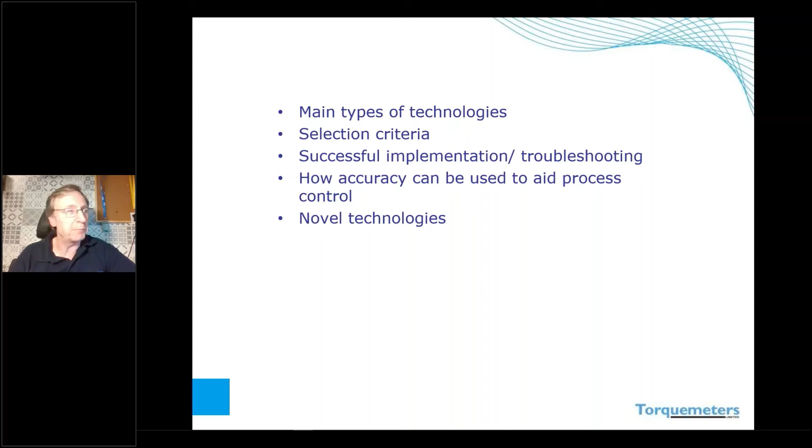So, what's a torque meter? It's an interesting question, and I've met people that only ever thought there was one type of torque meter. There are lots of different implementations, but basically it's a device that measures the twisting motion of a driven shaft or a coupling under load.

When a shaft is loaded, it twists. If you can measure that twist somehow and you know the speed, then you can accurately work out how much power is running through that shaft, and that informs on the driving machine and the driven machine. So in most instances, it's a power measurement device. It's independent of the OEM, and that can be useful.

I have to be careful and diplomatic, as a good Englishman should be. The OEMs obviously have their own patches to protect, and the good thing about most torque measurement devices is they are independent of them, so you can have an interesting discussion with OEMs about the power that you're seeing or the power that's being used by a compressor or pump.

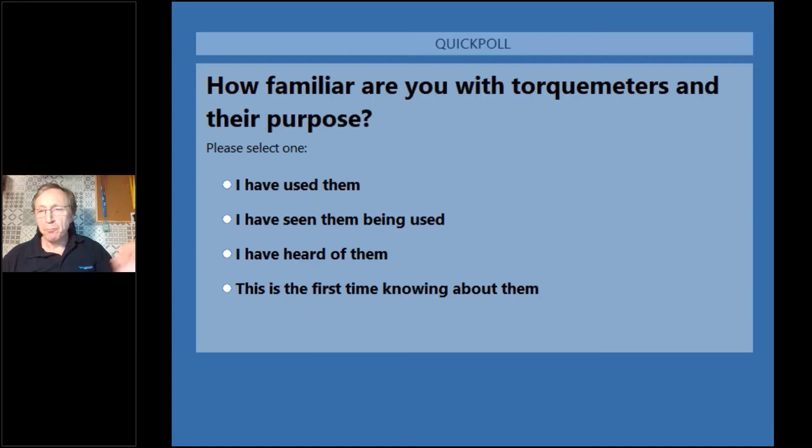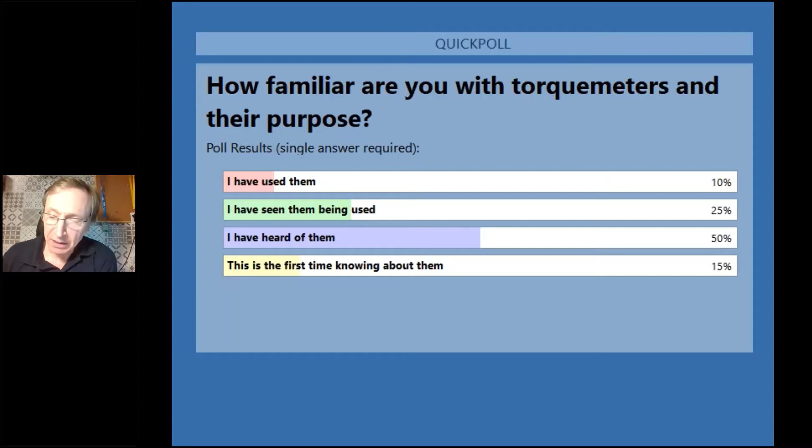Oh, 50% have heard of them. Not too many have used them, 10%. And a good amount, 15%, no idea what they are. So good spectrum, that is good. And that also informs me that there'll be people there that can ask some really difficult questions. So that's slightly worrying. But hey, we'll cross that bridge if we come to it.

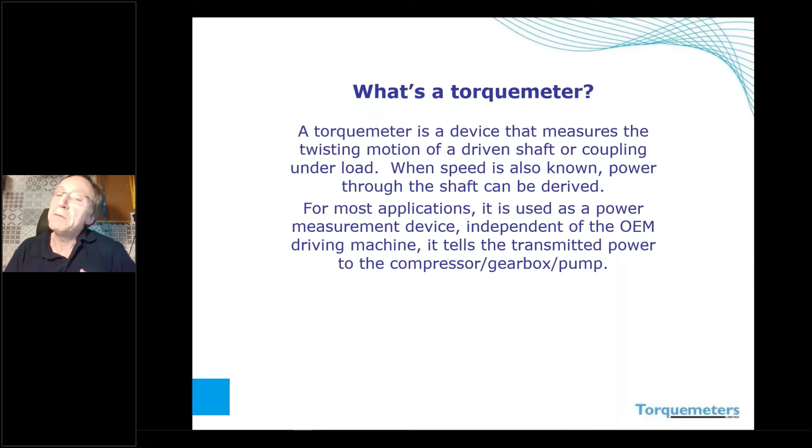There are 2 main technologies. And when I said that people use torque meters as a measuring device with a small t, they generally think of them as all the same. This is where it gets interesting in that there are 2 main types: strain gauges, which are very popular, and phase shift, which are, I would say, less popular, and there are reasons for that, which we'll come on to.

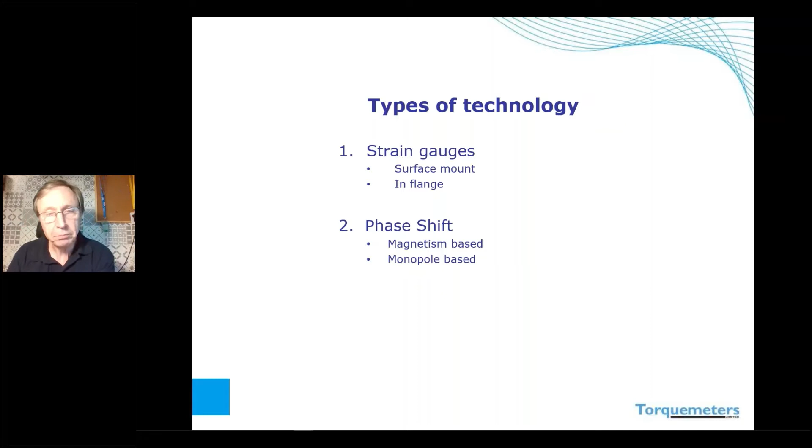It can also be placed outside, and when the shaft is twisted under load, the resistance of the Wheatstone bridge arrangement changes, and that means you get an imbalance in the Wheatstone bridge, and that electrical imbalance is translated into a torque reading because the stiffness of the material is known. So from that you can work out what the torque, and therefore the power, is.

And it's a really interesting way of doing it. It's been around for a long time. We've used them for some of our aerospace applications, and it's a tried and trusted situation. So you can either fit it on the inside of the shaft, or you can also put it on the outside. You need some other pieces of modification, but you can basically use the same coupling. And so that's basically what a strain gauge looks like.

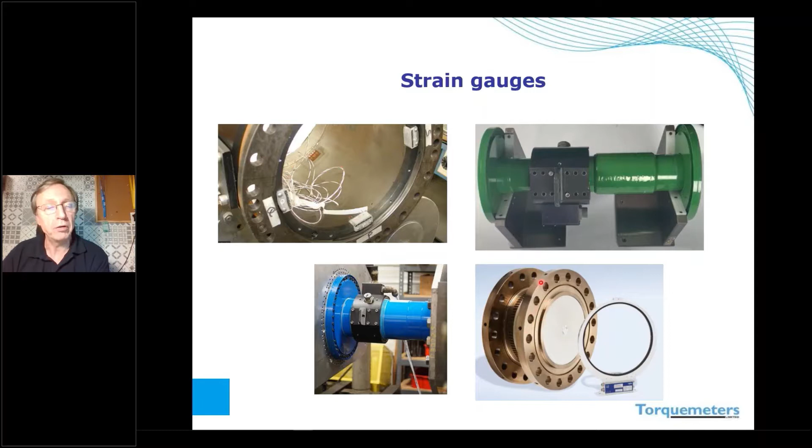There is a second type where you actually buy a complete flange that sits in line of your shaft and has the strain gauge already built in and calibrated. You can get different flanges for different power measurements, and they're quite neat and tidy, and you don't have to mess around with doing anything to your own coupling if you're going for this sort of technology. So that works quite well.

And so you have a coil around the outside that will generate by induction the power required to power the Wheatstone bridge, and also would take the signal back across to a control room somewhere. So there are a number of components.

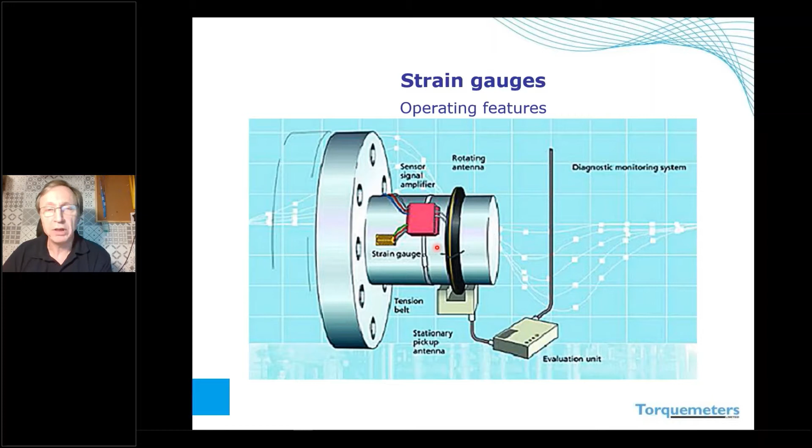That sort of will lead into some of the difficulties that I've encountered when people have used strain gauges, but we'll talk about that when we get there.

The main benefits of strain gauges, there's one huge benefit. Compared to phase shift, it's cheap and cheerful. You can strain gauge a shaft for a few thousand US.

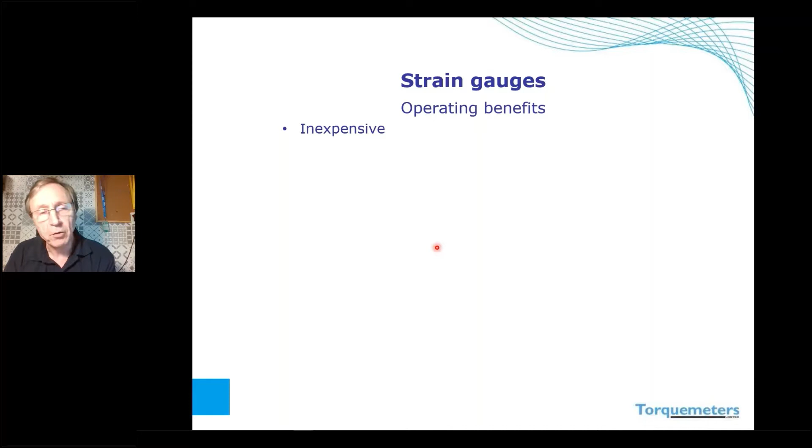You also can use the coupling that you have, or the shaft that you have, so you don't need to modify the running coupling in any way except to stick a strain gauge on it.

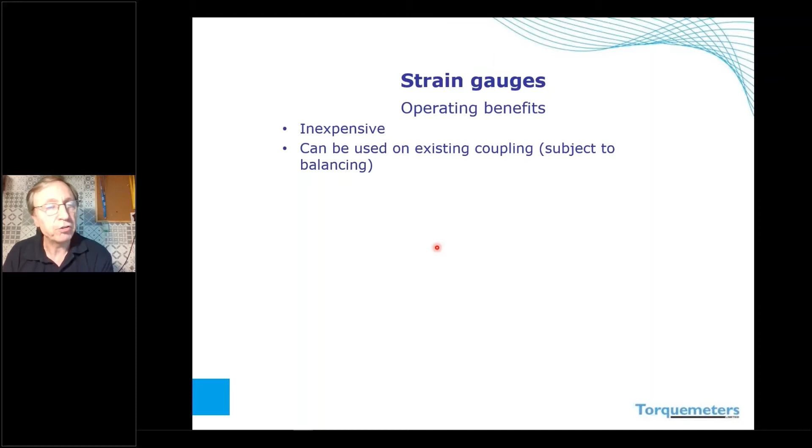And you can use it for torsional vibration measurements. Again, that's something we see quite often these days, where you've had a shaft failure over time and you replace it, and then it goes again and you replace it, particularly on fans and stuff. And it's not that the shaft's been overloaded, so the only suspect after eliminating everything else, bearing failures and the like, is torsional vibration, and putting a strain gauge on it will give you some good data as to exactly what's going on. So that's another benefit of strain gauges.

And like all things, not everything in the garden is rosy, as we say in the UK. It has electronics that rotate with the shaft, so you've got to be a little bit careful about what your intention is. Why are you strain gauging it? What are you expecting to get out of it? How long are you going to be using it for?

And that's quite important, because electronics rotating at any speed, 5,000 to 6,000 RPM, it's going to put stress on the components, both the components that power it and also the components of the Wheatstone bridge itself. So be careful of that.

Also, once it's in, it's in. Generally speaking, depending on the application, you put a strain gauge on because you want to measure it when it's rotating. What you don't want to be doing forevermore is stopping it because you don't think it's right, and having to stop it and check the strain gauge or reapply it, and then have another go and get a different result, thinking, well, which was the right result? Was it the first one or the second one? You don't want to get into any of that. So you've got to be pretty sure of your installation before you start running.

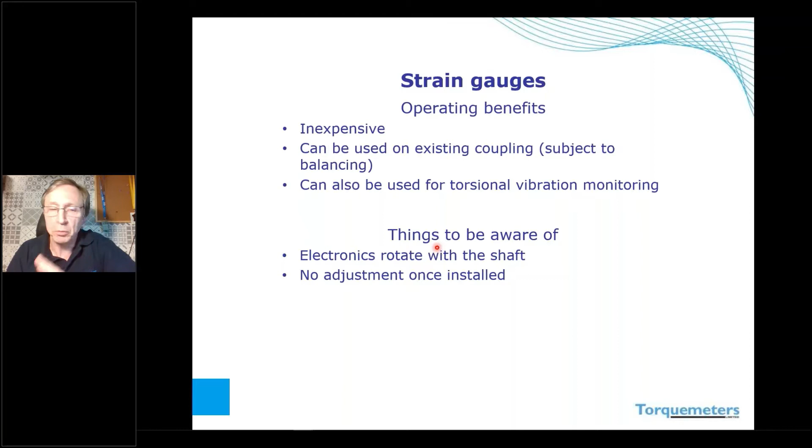And of course, the flange version is factory calibrated, which is fine in the factory, and it's only good in the factory if you can't check it once it's in the field. One of the big problems with strain gauges is that you can't really do any sort of checking of its calibration unless you take it off, and that's unless you stop the machine and then do some sort of checking of the install and some of the readings and some of the positioning. So it's not ideal from that point of view.

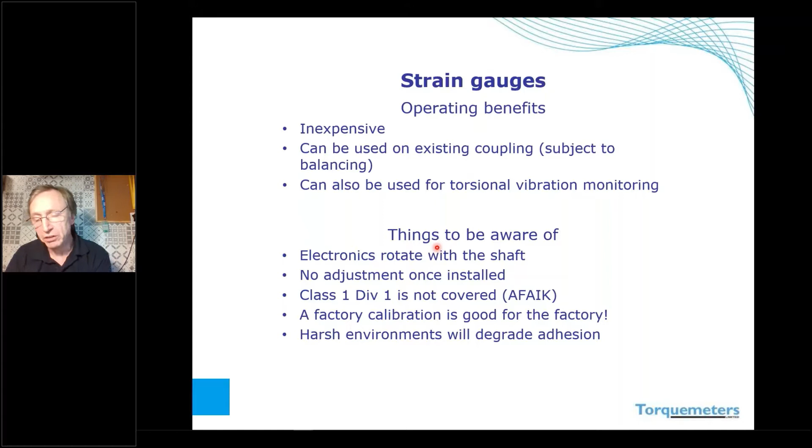The basic philosophy of a strain gauge is that you stick it on. It's glued on, and the degree of adhesion in a harsh environment, specifically oil and gas, but also if it's close to shore or any of those sorts of harsh environments, it's going to limit the adhesion for the strain gauge over time. So these are things you've got to be aware of, and there are lots of situations where actually these aren't issues, and in those situations strain gauges are a really good option. I'll have a table later on that shows where you should and where you shouldn't perhaps use each of the different sorts of technologies. So that's strain gauges.

Phase shift. Now phase shift is basically, from my experience, and I'd love to be told that I'm wrong, there are two different ways of doing it. You do a monopole or you do a Torquetronic.

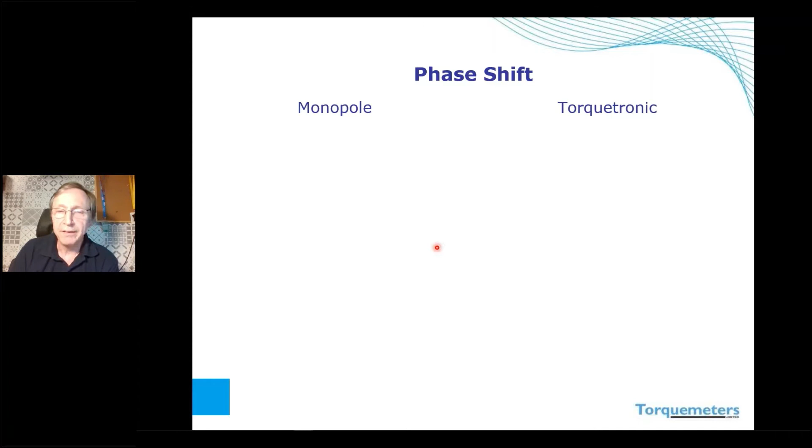Now a monopole basically is this system, which is basically Kop-Flex. If you're familiar with Kop-Flex as a Regal Beloit coupling brand, they have a very good phase shift torquemeter device. It still works on the principle of twisting of the shaft, but rather than the shaft twisting and having something stuck on the shaft, there are wheels that are fixed to the shaft at 2 points, and then they're brought together in a mesh configuration, as you can see down here. As those wheels offset under load, that's where you get your measurement from.

These changes in phase are picked up by two monopole sensors. They're passive variable reluctance sensors. Generally you have two at 180 degrees to help with alignment issues. So that's one.

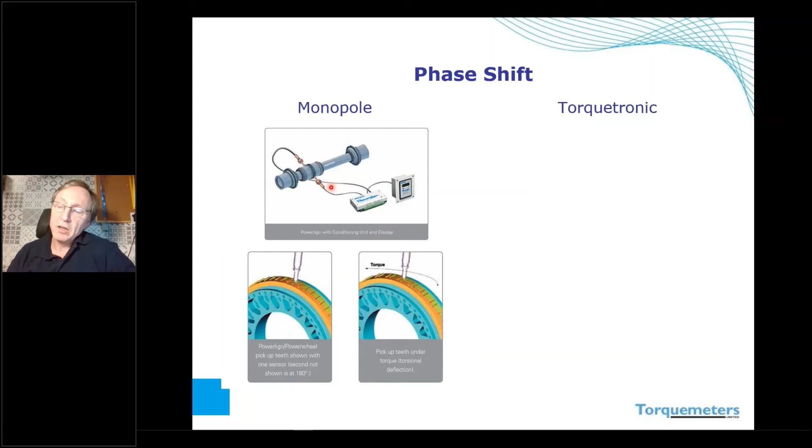The second one is Torquetronic, and that's the one that we do at Torquemeters Limited, and we've been doing that since about 1974. So there isn't anything new or sexy about this. I'd love to say it was, but it isn't. It's basically a slight modification of the coupling, which you can probably see there's a tooth wheel here and a tooth wheel here, and everything else is the same, and the coupling guard is manufactured by Torquetronic.

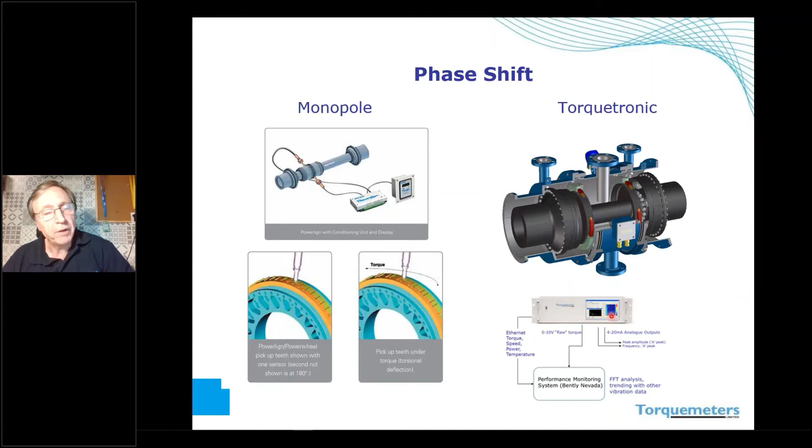Signals are generated inside these coils here, which I'll show you in a moment on the next slide, and then those signals go to a decoder, either in a control room or locally mounted. So this is how the signals are basically derived.

Both methods use the fact that sine waves are picked up when teeth cut through the sensing area, either the probe here or through the magnetic field generated by coils. There's a coil inside the coupling guard above the teeth at a space distance to allow for enough twist. As you twist, these sine waves generated from these become phase shifted.

Both couplings in both systems are calibrated so the stiffness is known. If you know how much they've moved and how stiff it is, you can derive the torque reading. So that's the main difference: you've got physical manifestation of twist in the metal itself moving on a phase shift device, versus something stuck to the shaft or coupling spacer that provides signal on a strain gauge.

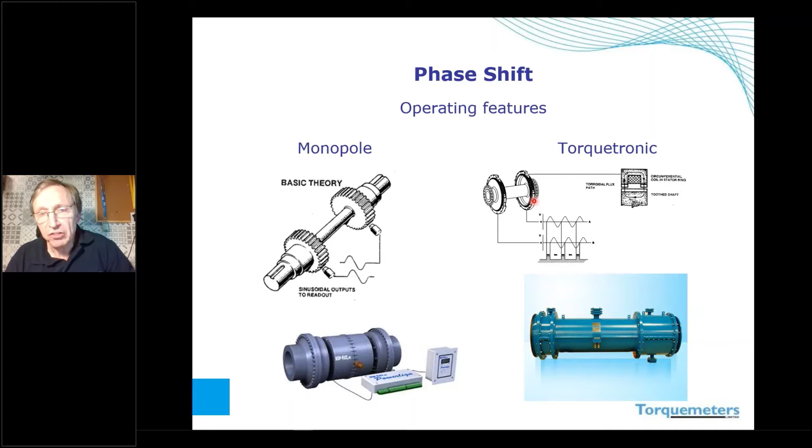So just like we talked about with strain gauges, a little bit about the operating benefits of phase shift. So for a monopole, there are no...

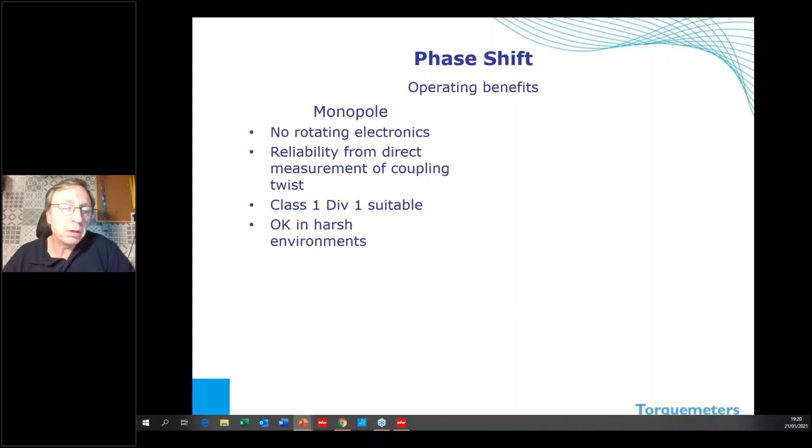I want to interrupt for our audience just to let them know that they can submit questions via the chat or the question toolbar. We'll have time afterwards for reviewing those questions. Okay, we forgot to tell them that, didn't we? Oh dear, that's my fault. That's okay, I thought I'd done something wrong. I thought you were going to say, what are you talking about?

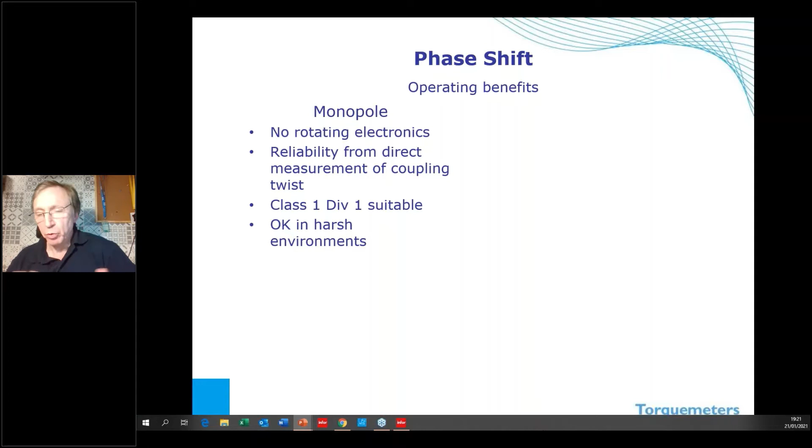So operating benefits of phase shift on the monopole: because you're taking readings based on the shaft, there are no electronics on the shaft to worry about. It's a direct measurement of the coupling twist. Because there are no electronics on the shaft, you can do class 1 div 1, and because it's just the metal moving, in general harsh environments are okay. So that's one of the main differences between the two technologies.

Similarly with the Torquetronic system, the first 4 are exactly the same. Torquetronic goes a bit further in that it will replace completely the coupling guard and has the ability to give a calibration check in situ. And it will do torsional vibration, whereas the monopole phase shift won't. There are a couple of other additional benefits.

So you could have a SIL2, which is safety integrity level, so you can use it as part of a functionally safe system as a control device. Basically, it's a redundant system, so it's 3 torque meters in one. If one fails, you've still got backup readings. Also, Torquetronic generally will do a temperature study to tell you what windage is going to do to your coupling guard environment. So those are the main benefits.

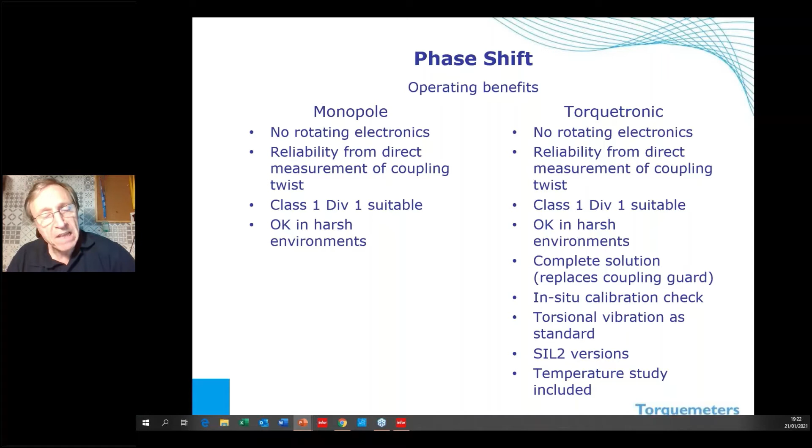But of course, like all things, it's not a panacea. There are things to be aware of. On the monopole, if you remember from the drawing, there are two probes, and they are supplied in a box for you to install as a user, or the OEM will install them.

The alignment of those - you have to weld a boss onto the coupling guard with a threaded hole, and then align the probe using feeler gauges, with certain tolerances. There's nothing wrong with doing that, but it's something you have to be aware of. You can't just chuck the monopole sensors in and think the job is done. There has to be alignment checks.

There isn't really a way to check calibration with that system, not that I'm aware of. It's a good system, and I've spoken to Kop-Flex about calibration, and their answer is it doesn't need calibrating because it's based on the movement of metal. As an argument, that's fine.

But I know I've seen people with clipboards who need to tick a box to say it's been calibrated, so being able to do a check is a useful thing. It also forms an additional section in the coupling because it's a drop-in section. Also, cost compared to strain gauges - it's more expensive, because there's more to it, really. And you can't do torsional vibration with the monopole system.

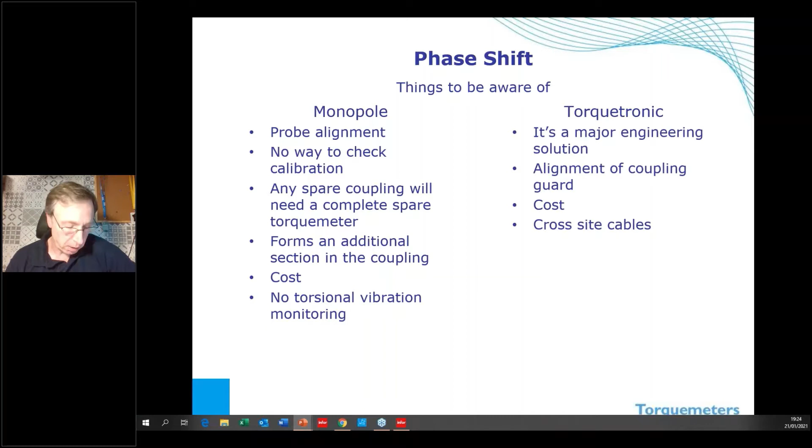With the Torquetronic, I suppose the main difference is it's a major engineering solution. Having to be involved with the coupling guard and how it connects to the driving and driven machines - all of these things add up to a bit more commitment from either the end user if it's a retrofit, or from the OEMs. If you need to know where the compressor case is compared to the shaft end, normally nobody cares. But for the Torquetronic system, because it's the whole guard, it has to fit between the two machines, so all of that information needs to be known at the design stage. So there's a bit more involved.

The alignment of the coupling guard is crucial. Normally a coupling guard, you just hammer it on with a big hammer - as long as it covers the coupling, you're fine. But with the Torquetronic system, it has to be aligned using feeler gauges to get the best out of it. Of all the systems, the Torquetronic is the most expensive, so that's obviously a thing to be aware of.

Quite often there'll be cross-site cables to go to a control room, and I'm constantly amazed how often those cross-site cables are not connected up correctly. There's only four of them, but you'd be surprised - you get coil A going to coil B in the control room, even though we label them. But anyway, that's by the by. So there are things to be aware of.

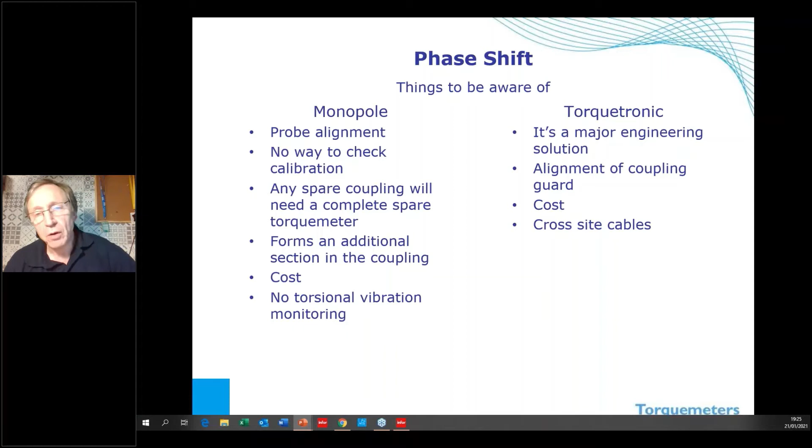So how do you decide which one is right for your application? There isn't a yes or no answer to this, but some of the criteria you need to think about is, what are you going to do with it and how long do you need it to work for? If you're using it for process control, feeding back the power reading because it's going to control something, then I would say a strain gauge isn't a long-term solution for that, whereas both the phase shift technologies will be.

That leads into continuous duty. If you're looking to continuously monitor over the lifetime of the plant what's going on in terms of power delivery, then a strain gauge is not going to be good for 7, 8, 9 years. At Torquemeters, I've seen strain gauges fail after 6 months, and that's just because it probably wasn't attached properly.

But you know, it isn't good for long-term use. Conversely, acceptance tests - it's a great place for strain gauges. If an OEM has got to deliver a certain amount of power to the end user and they want it to be shown rather than calculated, then you can put a strain gauge on the shaft, start the machinery up, and say, there you go, there's your reading. And then what happens after that doesn't matter. And that's a big market.

Service support is an interesting one. Can you do any diagnostics on site? So if you have a problem with the reading or you don't like the reading, can you do anything about it? I think with strain gauges - and okay, I'm biased - but with strain gauges and with monopole, it is difficult because there's nothing to interrogate.

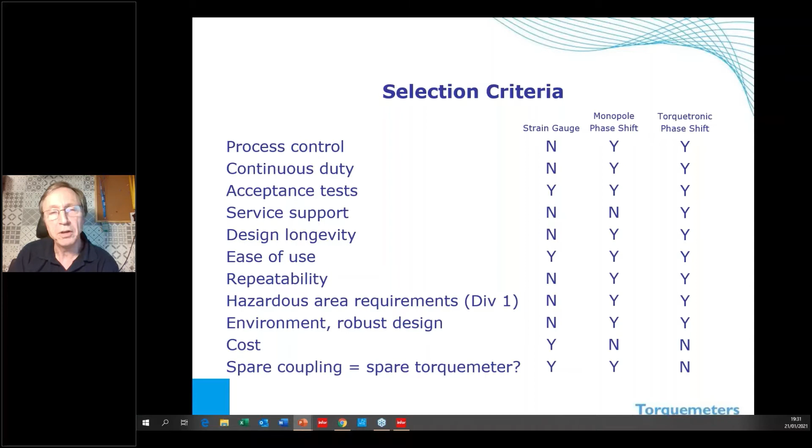The other one I haven't put on there is calculations. You can calculate what should be the right power, but I think that's for a different day, because there's lots of reasons why that gives such a margin for error that it suits everybody but doesn't actually tell you very much. But we won't talk about that.

So we'll talk about installation and some things to be aware of. The key with strain gauges is adhesion—make sure it's on the shaft properly, because if not, you get duff readings and that makes things worse. For Monopole, the position of the on-guard sensors to allow for correct thermal growth is key, because if you move away from the optimum position it changes the values, and that's not what you want. It's all detailed clearly in Kop-Flex's literature, but it's something to be aware of.

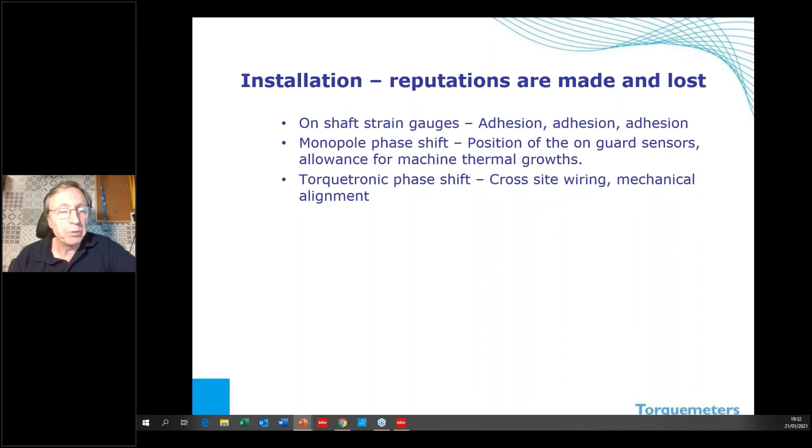The other thing I've found is that, always in fact, the installation is handled by the OEM or by yourselves as a site operative—it's not handled by the manufacturer of the equipment. So you've got to organise correct positioning of the bosses that the sensors go through, and also correct alignment. It's similar with the Torquetronic—you've got cross-site wiring, which I mentioned before, which amazes me how people get wrong. But also you've got mechanical alignment you need to be very careful of, because if you don't get that correct, you'll get readings that don't make any sense.

Calibration is the other thing I'd like to talk about briefly before we get on to why anybody would bother to measure. Once it's on the shaft, strain gauges are difficult to calibrate - you've really got to stop the shaft from rotating and take some measurements. Monopole phase shift is really only a factory calibration because you don't need one apparently. With the Torquetronic system, you can do an on-site roll-down check, basically a simulation of something we do in our factory, but on site, to check that the zero is okay. That's quite useful as a diagnostic tool, as well as being able to check the calibration.

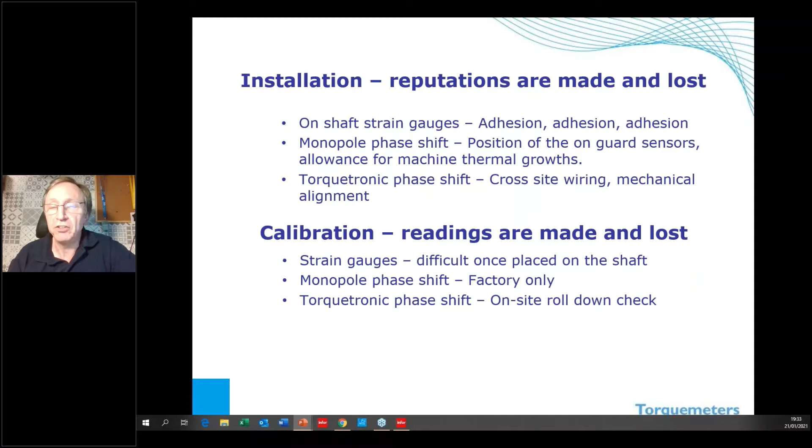So why on earth does anybody want a torque meter? Excuse me, I'm going to have some gin.

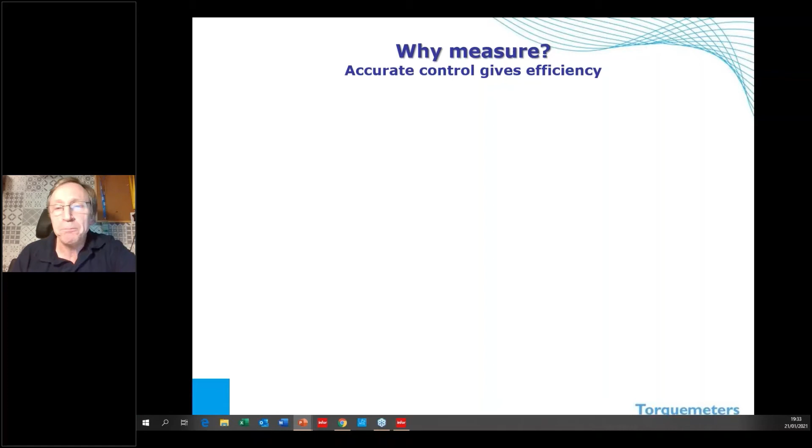We're 33 minutes past the hour, Craig. Yep, okay, well we're fine I think. So why would you use one? Let's do this, let's get all this on.

You would use them because you want to make sure that all the money you're spending on fuel, whether it's a gas turbine or a steam turbine, is giving you useful work, either in a pump or a compressor or whatever. So being able to run it as efficiently as possible is key. If you've got a gas turbine, the figures speak for themselves. If you've got a steam turbine, you've got lots of complications because of water quality and consumption tables, and you've got no real way of knowing what's going on in terms of power delivery. So a torque meter is a really good solution.

Generally, a lot of money is spent on washing compressors and turbines especially. Having a torque meter gives you data as to when you should do it, and perhaps more importantly, when you don't need to. It also gives you an idea of, having washed, how much power do you get back - was that $10,000 US or whatever the Canadian equivalent is, was that worth spending to get the increase in performance we've got after washing?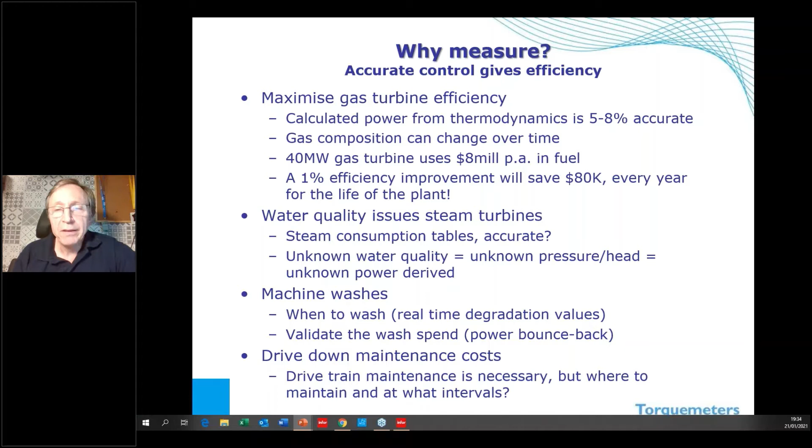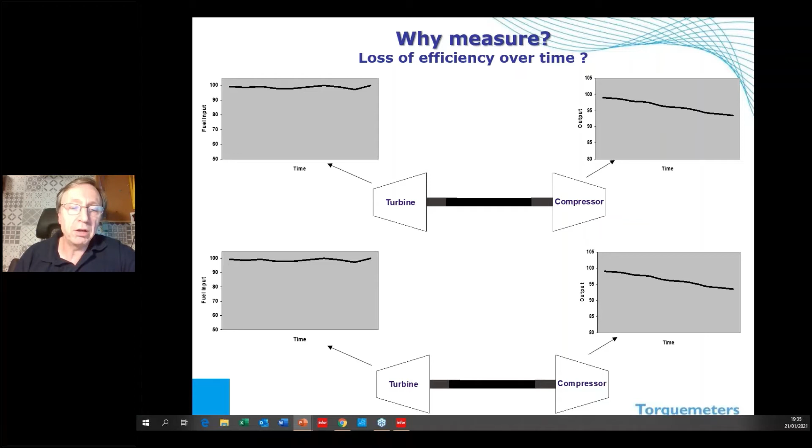So all this is to do with maintenance costs, and this is my favorite slide in the world-ish. So why would you measure? On the screen now, you've got two identical scenarios where you've got a turbine driving a compressor, and for the same amount of fuel, you get less work over time. They both look identical.

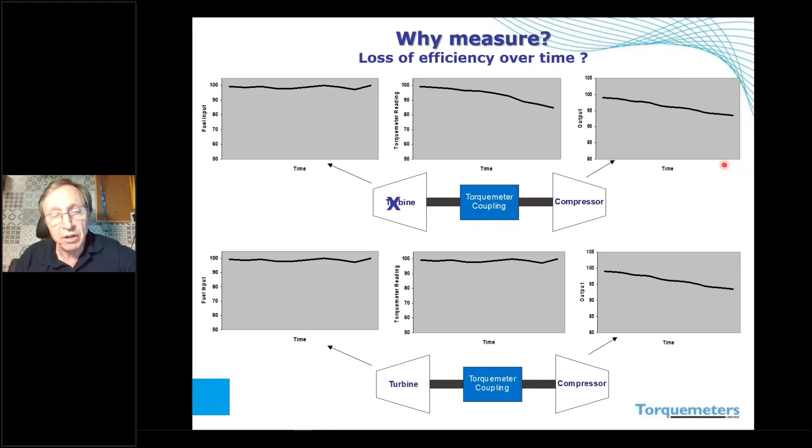If you have a torque meter coupling in between and the torque meter is reading this, then you know the power in the shaft is decreasing. So the compressor is doing whatever it should be doing with the power it's given, and it's the turbine that has suffered a degradation over time. Similarly, if you put a torque meter coupling in this one and the torque meter is showing this - stable - then all of the power from the driving machine is going into the compressor, and it's the compressor you need to look at. So that gives an idea of why it's useful.

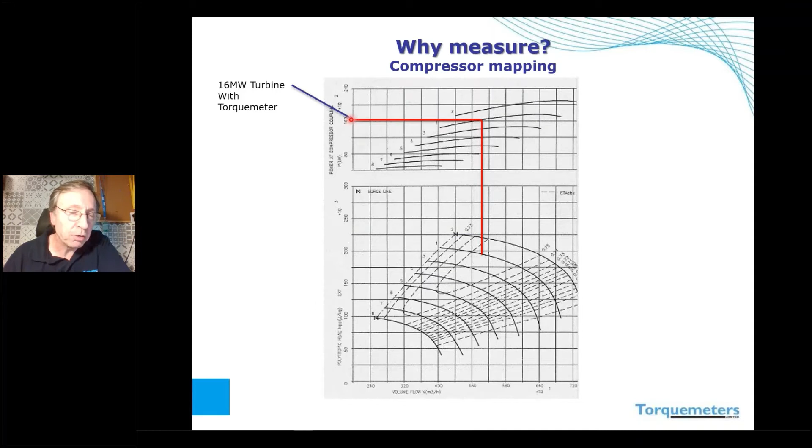Whereas if you have a torque meter, you get a much more accurate power measurement, typically 1% accuracy. So you can map straight down onto your efficiency island, and that gives you much more of a warm feeling that you're getting the most out of all the assets you've spent money on.

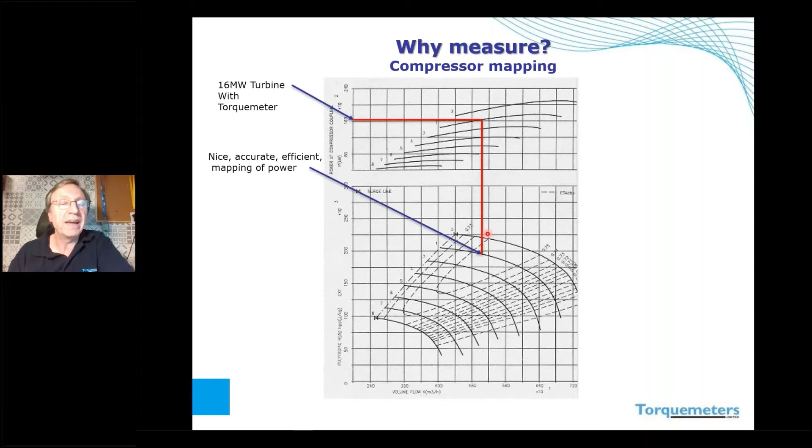So that gives an idea of some of the things people do and why it's used. In general, when we speak to end users and ask, you've got torque meters, what are you doing with them, why are they so fantastic, why do you love them so much - the most popular answer is data. It gives them accurate data, and that means they can make good decisions based on it.

So now we're going to talk a little bit about novel methods, some of which we've got experience of at Torquemeters. Some of them I've seen touted but not really seen used, apart from this one, which has been around a long time - zebra tape and an optical probe. You stick the zebra tape around the shaft, and using an optical sensor you get a strobe effect which gives you feedback on torque. That's fine in theory.

The issue is you have to get it aligned correctly, you've got to get the ends of the zebra tape correct, and it has to stay clean. So for a quick check, yeah, I've seen them used and they are okay, but it is a bit of a faff, as we say, to get it lined up properly and to get it to work as it should.

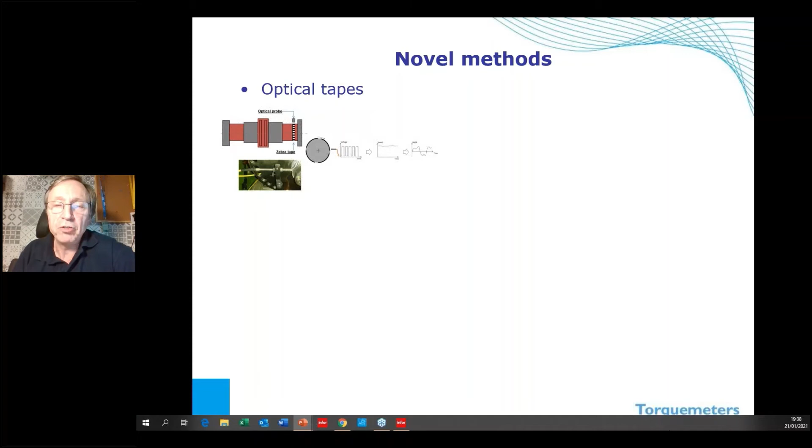From here on in, some of these I've seen touted, and they are variations on a theme, pretty much all of them. A surface acoustic wave is basically a frequency-based strain gauge based on a quartz substrate. Rather than a Wheatstone bridge being stuck onto a shaft, you stick a quartz substrate onto a shaft which rotates, and in the same way as a strain gauge, you power it and get a similar sort of response. So it suffers from some of the drawbacks of strain gauges, and to my mind I don't really see any benefits of this as opposed to using a strain gauge - it's just another variation.

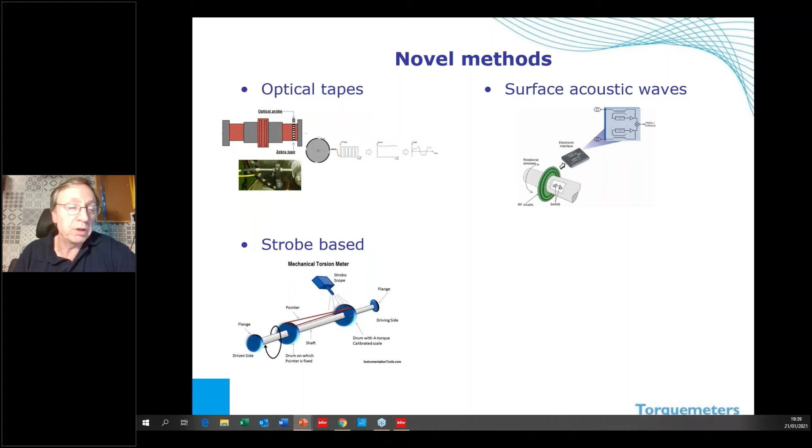There are also various versions of optical strobe based systems, and this was another one I've not seen but thought looked interesting. You strobe one wheel whilst measuring from another wheel, and any twist shown on the strobing is taken back to the sensor on the first wheel, which gives you an idea of what's happened to the twist, and from that twist you can then measure torque.

This one got me very excited, almost as excited as the last one we'll get to in a moment. This was basically magnetizing a section of the coupling or the shaft and using the inherent magnetism as a way of detecting twist. In theory, fine. The problem with magnetism is it's a strange beast - it's an exact science, but in the real world it's influenced by other metals around it, other ferrous metals, and we at Torquemeters have some experience of the way magnetism can affect our magnetic coils. So I'm not surprised it's not very popular, although on paper it looks really interesting.

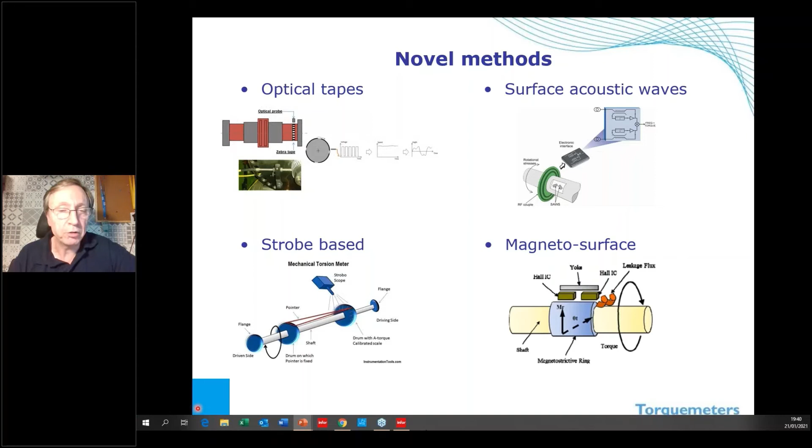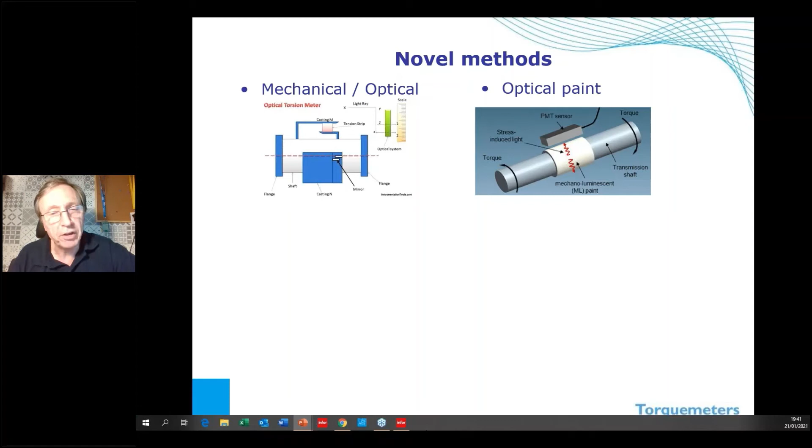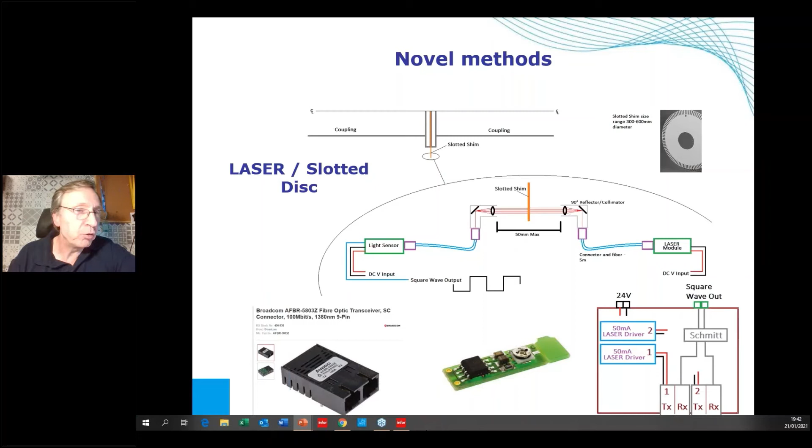So that's what I wanted to talk about. There's some further reading if you're interested on the different technologies, and that's me done, really. So thank you if you're still there - I'm sure you are. Any questions, I'm more than happy to try and answer them.